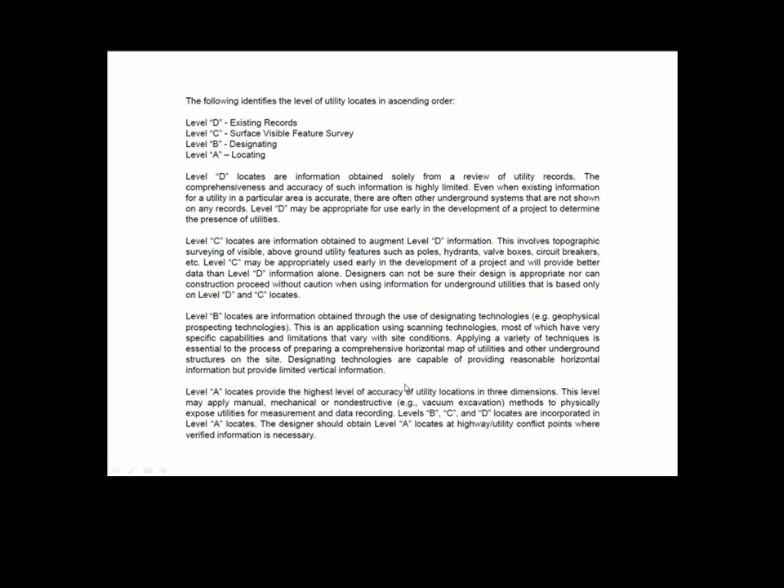So as I said, the definitions of the levels have traditionally been in the Utility Accommodation Manual. However, it's my understanding that it is being removed from the UAM and being defined in the American Society of Civil Engineers ASCE library under the CI/ASCE 38-02. If you go to that website, you'll see that the standard guidelines for the collection and depiction of existing subsurface utilities and utility data have been defined.

Reading down, it says the standard addresses how utility information can be obtained, what technologies are available to obtain the information, and how that information can be conveyed to the information users. They're all defined here. Who should be responsible for typical collection and depiction tasks, what factors determine which utility quality level attribute to assign to data, and in the end, what the relative costs and benefits of the various quality levels are.

So what is different is that the surveyors now don't have the option of locating existing subsurface utility levels under the old line types and levels. They have been retained for legacy purposes, but it will not be an option for them to locate them that way in any new surveys. So you should receive existing utility levels. All should have a quality level assigned to them.

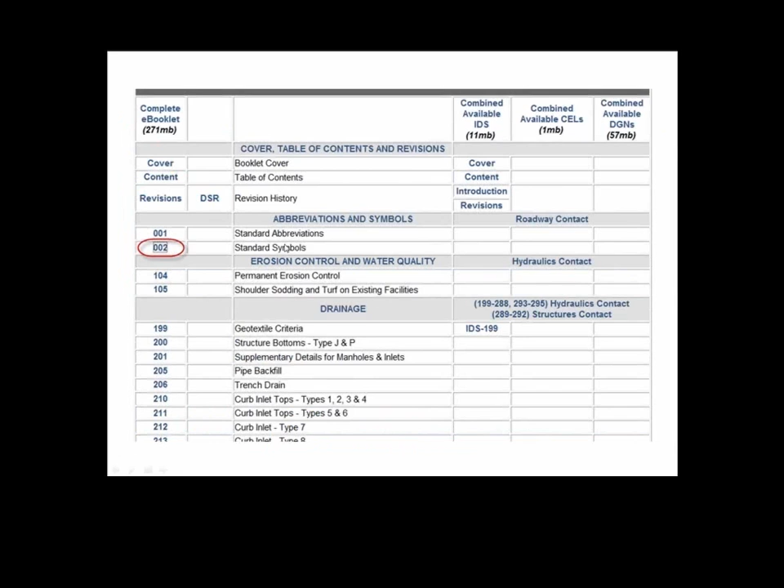Moving on, what is new is that they have now been defined in the standard index. So if you look at the FDOT design standards, go to their website, go to the most requested, and look at design standards, and under the design standards e-booklet, move on to standard symbols under abbreviations and symbols. Pick the 002, and you'll end up with the standard index and the standard symbols for plan sheets.

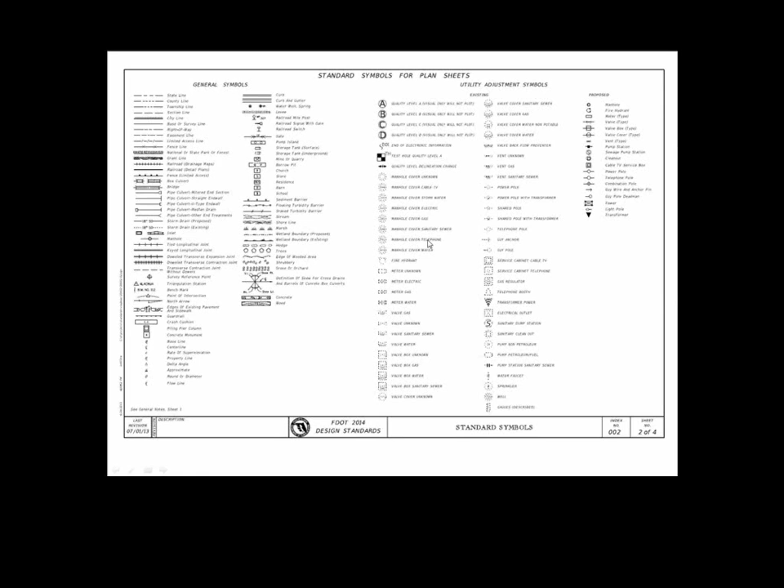If you move to sheet 2, on the top right, you'll see utility adjustment symbols for existing utilities. Zooming in on that, you'll see that we've added some point symbols. Now the A, B, C, and D symbols, these will be very rare. You may not ever see these in an existing survey delivery, because the point of these A, B, C, and D symbols is for the surveyor to locate, depending on what they think it may be, and then reconcile these quality levels at a later time.

The EOI, end of electronic information, is to show when there is no more information designated by the utility provider or the utility company that comes out and designates or paints the ground, paints the line. The test hole symbol is for when we actually expose, whether it's through vacuum excavation or whatever, the utility is actually exposed and we can see it and get an XYZ on the level. And then we've also added a quality level delineator for the purpose of showing a change in the quality level.

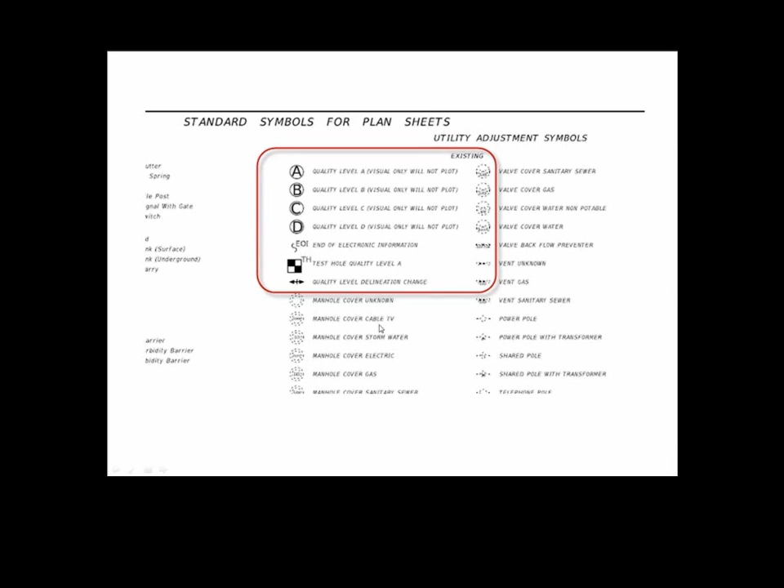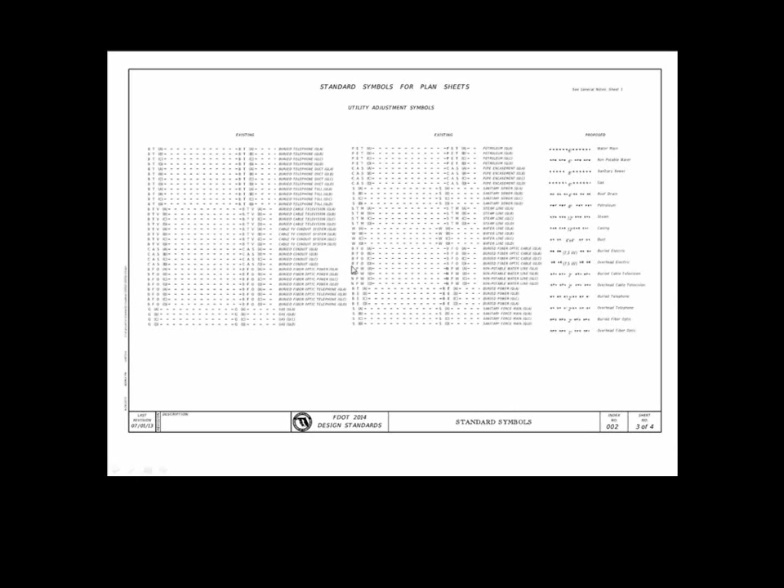If you move on to sheet 3 of the standard symbols for plan sheets, this is where you're going to see a lot of new stuff. And what you see is existing utilities as you have known them before, but with, in parentheses, an A, B, C, D behind them. If I zoom up on the upper left, you'll see this is a buried telephone, A, B, C, and D quality levels, buried telephone ducts, and buried cable television, and so on.

The one thing I have to tell you about this is that after a further review, the utility engineers have decided that the level A should be removed from the standard index, so therefore I think in the works is a revision to remove the A level. And the reason for this is that it is going to be extremely rare, if not at all, that the A level will ever be shown. The only time it would possibly be shown would be across a bridge, or if a utility is exposed in the entire length. And typically in our types of road projects, we don't see that. So the A will be removed.

What you will see in the index from here on will be B, C, and D, however, and those line styles are going to come into effect. And as I said, the surveyors will not have the option of locating the utility without assigning a quality level. The legacy levels are there, the legacy line styles are there, but on any new project, the existing utilities will be assigned B, C, and D, or we'll have a test hole A, and then you'll have delineators and end of information symbols.

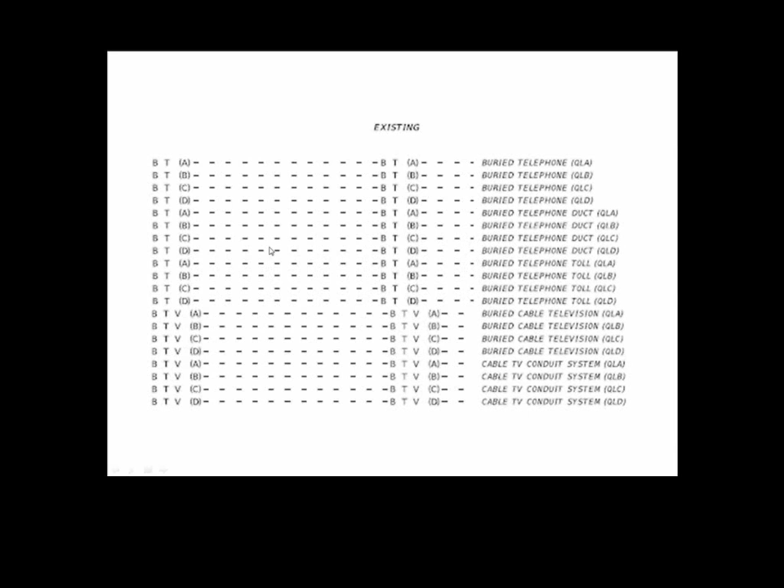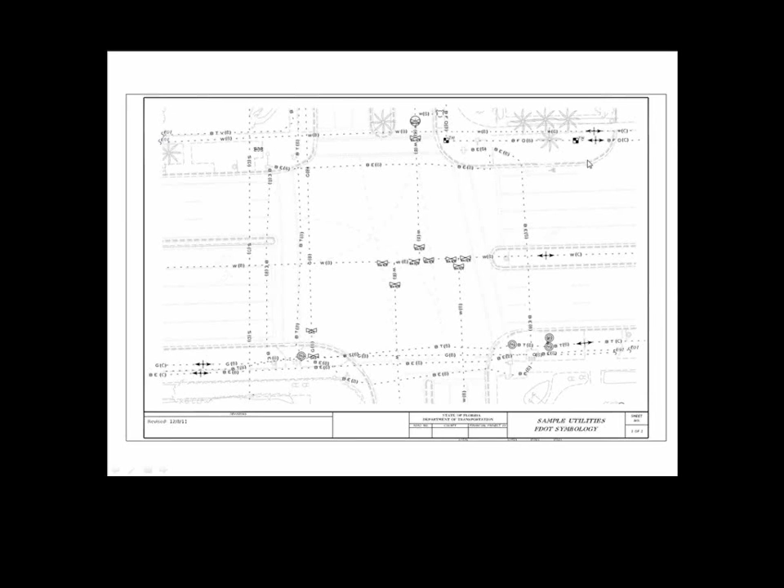What you see here is a possible example sheet of what you may receive from the surveyor, showing existing utility levels. You can see in the upper left there's some EOI symbols at the end of the buried TV lines and the water line. And if I zoom up on the upper right, you'll see the water line B. As it changes to water line C, the delineator symbol was placed. Just below that, on the buried fiber optic, you see a test hole symbol where it was exposed, so therefore we know exactly the XYZ position of this test hole.

However, in between the two test holes, there's another one on the right. We still designate this as B because we don't know exactly. It could meander, and the electronic designations are only a close approximation. They could be as much as 3 feet off left or right, and the depth also depends on the type of designator. It can depend on soils, whether radar tomography has been used, and so no matter what, we just don't feel comfortable putting an A on this line in any case, so they will stay a B. That's why the A symbol was going to be removed from the standard index.

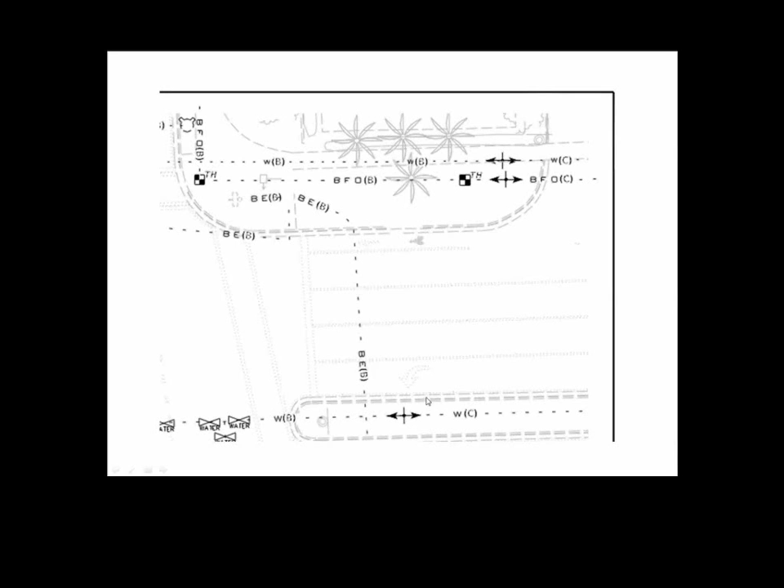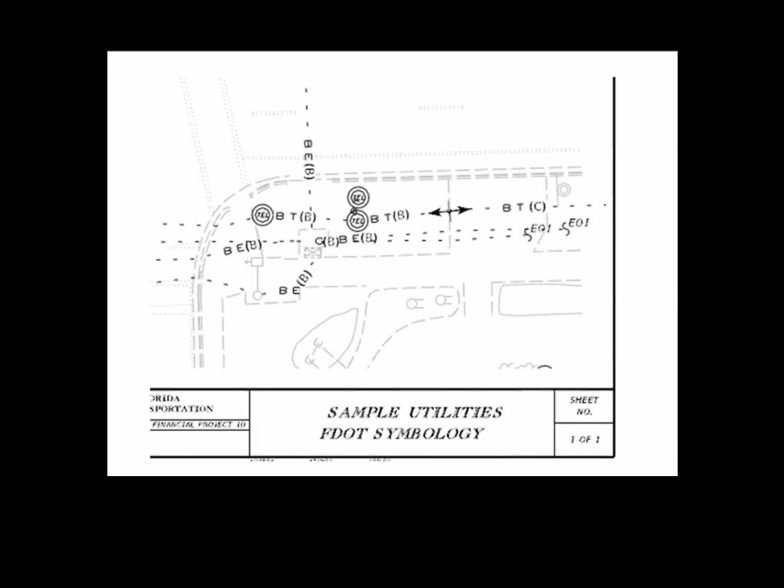And that's pretty much my presentation. Any questions? What do we have here? On your first, can you put that up there? Mm-hmm.

It says on your first slide, you said designating was level B, but you list the most intricate level A in the paragraph below. This is not consistent with the paragraphs. What I can say about that is that those kind of, what do you want to say? Yeah, actually, this is the kind of question I would defer to your utility engineer, and we're going to go back to them on that.

How would levels be updated if more info is received during design coordination? That will be on the designer, the utility engineer or whoever's working on utilities. The surveyors are going to do what they can. They generally will not know. Most of the time, it will be level B that you'll see coming out of the survey. However, if anything changes during the accommodation process, that's going to be on the utility engineer to make those changes.